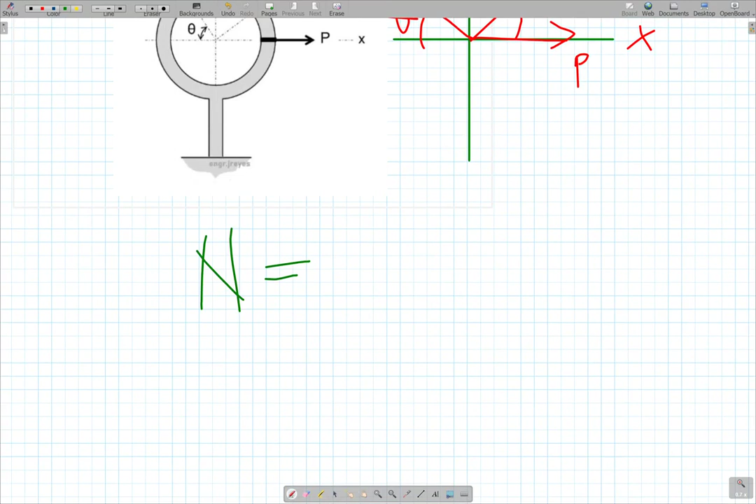1 Newton is equal to 1 kilogram meter per square second. Follow? Diba? So, ang kilogram is actually mass and then ang meter per second square is actually acceleration. So, actually, class, Newton is force. Okay, so 1 Newton is equivalent to 1 kilogram meter per square second.

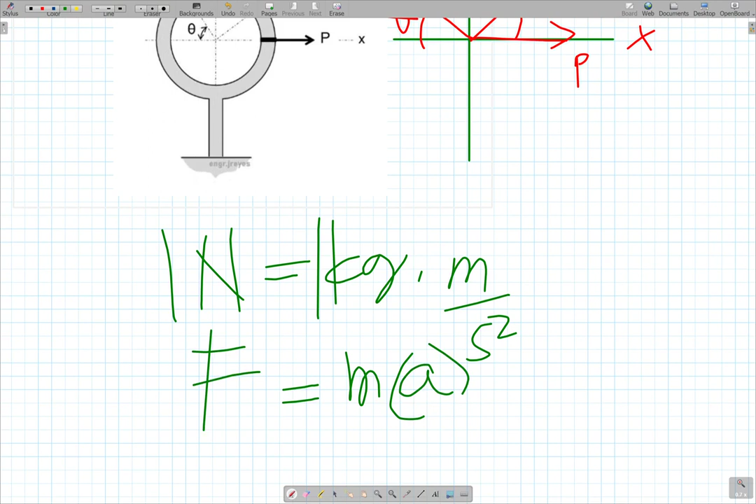So, your force is equal to what? Mass times acceleration, or sometimes due to the weight, force is equal to mass times gravitational acceleration. Now, this one is the weight. Okay? Follow. So again, dapat alam mo kung ano ibig sabihin ng Newton. 1 Newton is 1 kilogram meter per square second. There. Okay, so again, basahin natin ulit ang question.

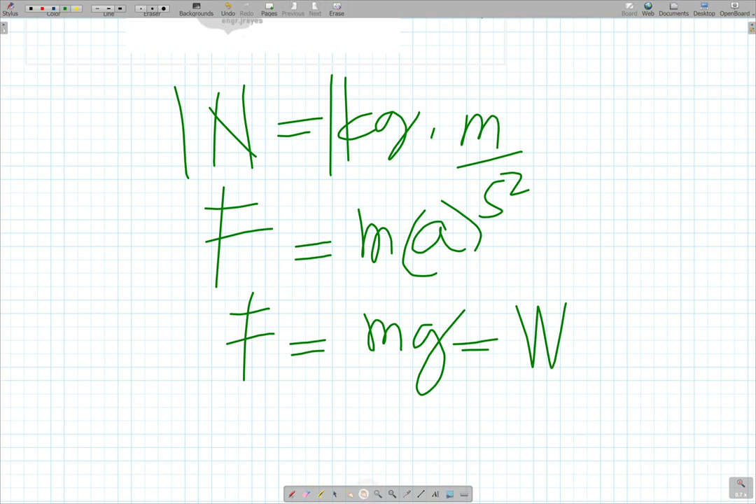Okay, so the resultant, ang instruction, class, sa situation na yan, ang sabi dito is the resultant of the three concurrent forces. 1, 2, 3, diba? So, the resultant of the three, ano ibig sabihin ng resultant? Resultant is the sum of all forces. So, there are 3. So, isa-sum up mo yan, then makukuha mo ang kanyang resultant. Pero dito, binigay ang resultant. How much is the resultant?

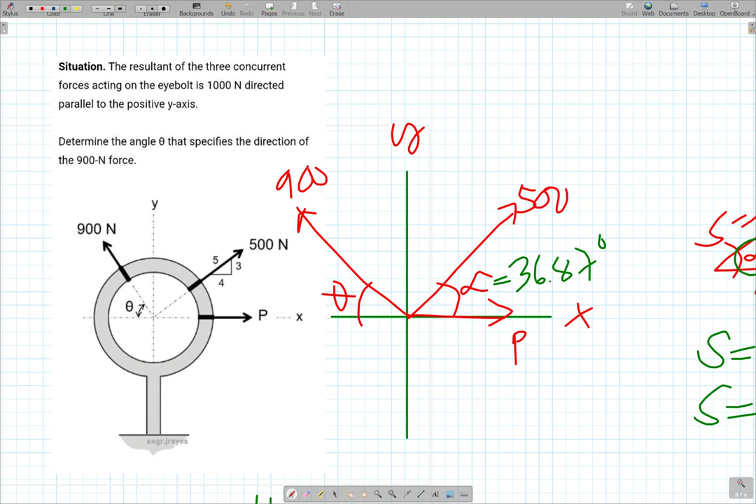Ang sabi dito, the resultant of the three concurrent forces, yung 1, 2, 3, acting on the eye bolt, is 1,000 Newton directed parallel to the positive y-axis. So, yung resultant R natin, class, binigay siya na how much? 1,000 Newton, tapos ang direction niya parallel to the positive y. Ibig sabihin, upward direction ang resultant.

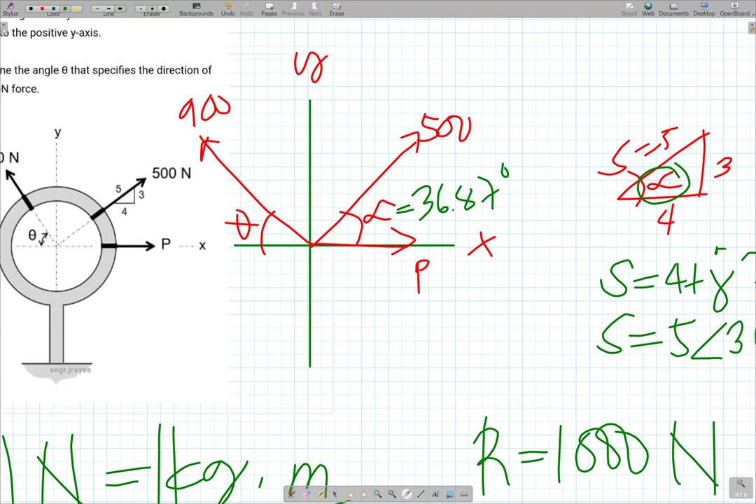Follow? So, eto na, class, yung resultant, ang ibig sabihin ng resultant na to, 1,000 Newton, actually, galing ito sa sum ng tatlong forces, di ba? Force P, force 500, then 900. Okay? Clear? So, the resultant of the three concurrent forces acting on the eye bolt is 1,000 Newton directed parallel to the positive y-axis.

So, ibig sabihin, pag i-graph natin ito, class, based from the given, pag gamitan natin ito ng x and y, binanggit kasi ng x and y, diba? This is your x, of course. This is your y. So, nasaan dyan ang resultant R mo na sum of the forces P, 500, and 900? Sabi sa instruction is directed parallel to the positive y-axis. So, meaning, class, nandito ang R natin, which is 1,000 Newton.

Diba? So, he is asking for what? He is asking for angle theta. So, nasaan ba yung theta natin? That is 900, no? Yung angle theta natin, that is between horizontal and 900. So, ano yung plano natin para makuha natin ang angle theta? So, if you look at sa 900, ganito siya. Nandito yung 900, di ba, class? Nandito yung horizontal, nandito yung theta.

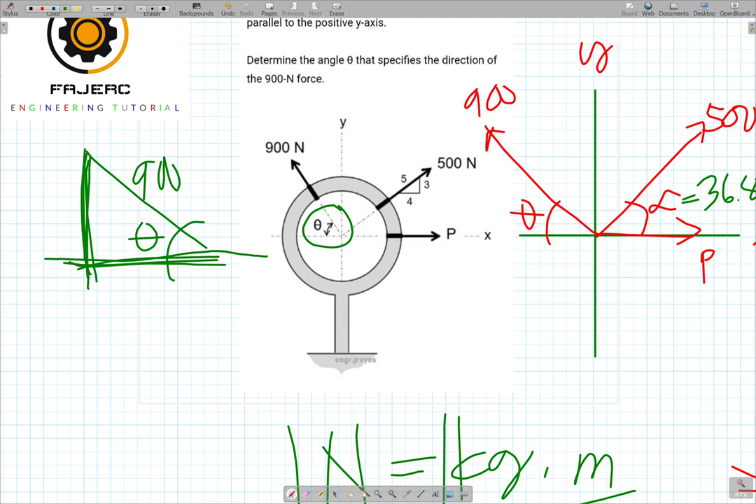Okay. Kung meron lang tayo sana force dito, we can solve for the theta either using tangent, sine or cosine. So, paano natin gawin, class? Given ang R mo, which is the resultant, na 1,000, tapos ang direction niya going upward, parallel to positive y-axis. So, based from the given, class, makikita mo talaga ang resultant R mo is equal to Ry. Follow?

The vertical component of R; wala na siyang horizontal component. Horizontal component of R is how much? Of course, 0, kasi directly towards positive y. Nakuha? Again, ang binigay sa atin, yung R natin is 1,000, tapos ang direction is parallel to the positive y-axis, going dito sa taas. So, ang resultant R mo, which is 1,000, is already your Ry. Then, ang Rx mo, kasi ang R may component, horizontal and vertical. Since dito ang direction ng R mo, ang horizontal component, of course, 0.

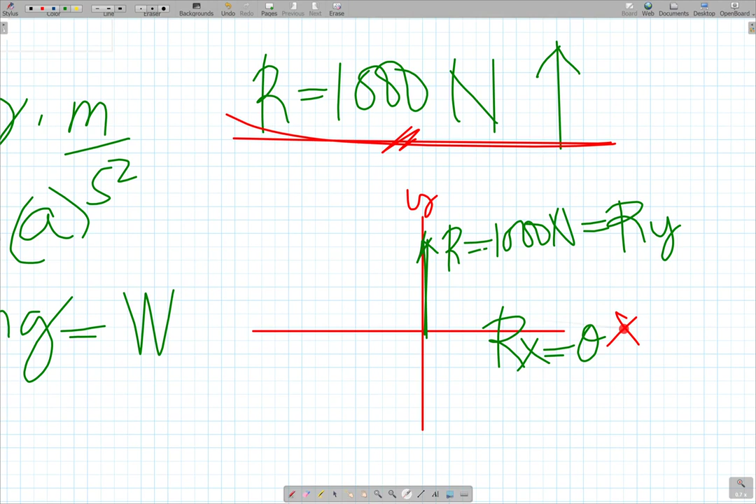Pero pag ganito, for example, naging dito yung R mo, of course, meron siyang horizontal and vertical component kasi naka-incline siya. So, since ang R mo parallel to positive y-axis, ibig sabihin straight talaga siya. So, meaning, your R, 1,000, is just the same as Ry. Then of course your Rx is 0.

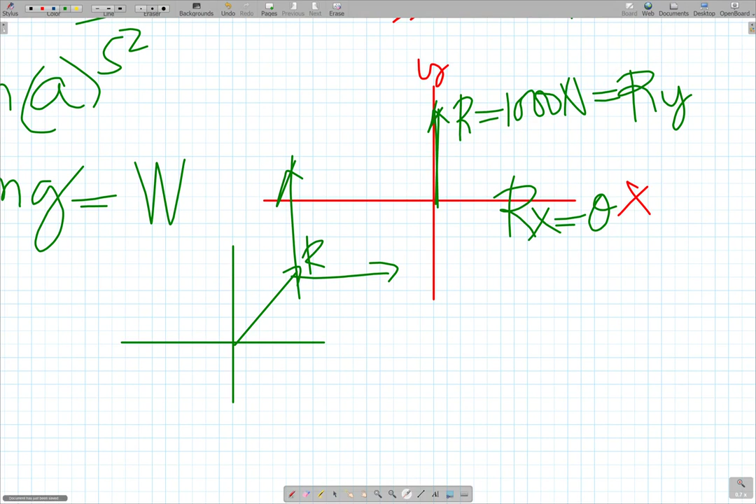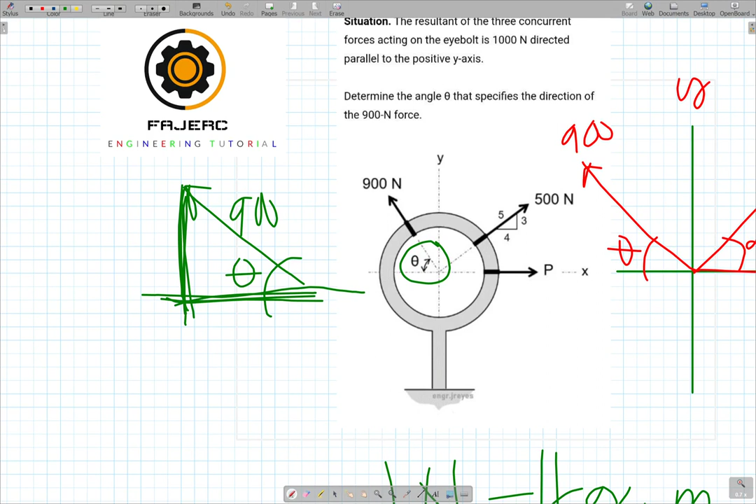So how will you solve for the theta? Kasi ang gusto niya, class, is determine the angle theta that specifies the direction. Kung meron sana component ng 900, horizontal or vertical, pwede na natin makuha yung theta, kaso wala. So based from the given, pwede natin makuha yung component ng 900. Klaro? Okay.

So, gumawa tayo ng working equation natin. Since ang Ry mo is equal to 1,000, that is already your summation Fy. You follow? Just the same as Ry. So, ano ibig sabihin, class, ng summation Fy? I-sum up mo lahat ng vertical components ng mga forces. So, there are 3. Tingnan natin kung ano yung meron.